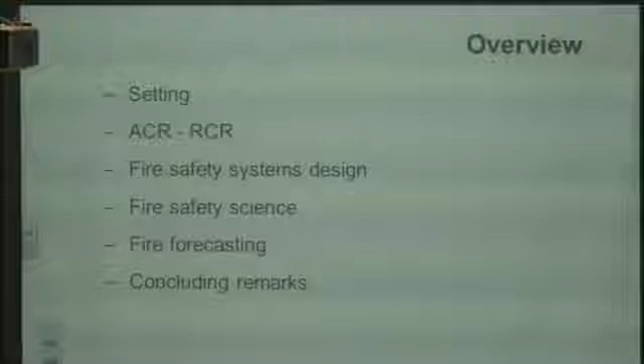So I would like to start off with a short overview by introducing a concept that I kind of invented on this occasion. It's available computing resources versus required computing resources. So I would first like to have some philosophical discussion, if you like, on this concept. And I'll briefly touch upon what could be the consequences in the context of fire safety systems design, but the main body of this talk will be about fire safety science and how numerical simulations, to my opinion, might help improve our knowledge in this interesting field.

If I have time, I'll also briefly touch upon fire forecasting, and then obviously I'll try to end with some concluding remarks. Now, before saying what I will talk about, I first want to say a few things that I will not talk about, and not because they would not be interesting, but you have to make some choices. So I will not present a review of existing models in the state of the art of today. So if you were expecting that, I'm sorry to let you down, but this is not the contents of this talk. And I will also not talk about how you can assure quality of numerical simulations per se. That's also very important and very interesting, but this is not the issue of today.

I will also restrict myself to the gas phase. So that means I will not say anything about pyrolysis modeling and only very few words on possible interaction of water with smoke and fire. So these things are very interesting, very relevant. Many of the talks here are on these topics. I'm well aware of that. But the story that I will tell is in a way generic. So it's not because I tell it in the context of gas phase that it would not apply to these domains either. Now, before you think this is going to be the shortest keynote ever, of course, I am going to address a few topics. So this is what I'll talk about, the gas phase simulations in these three domains.

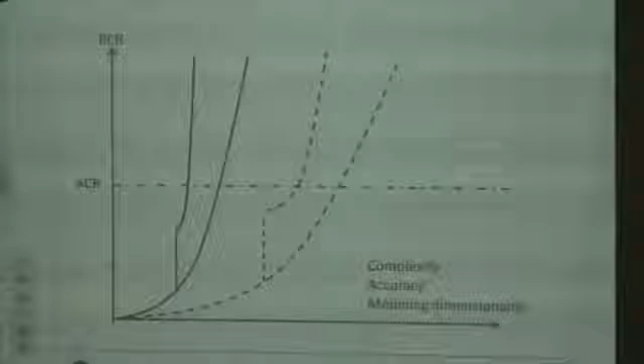Now, this is a sketch. So I'll talk you through this sketch. You see two axes. The vertical axis is the required computing resources. So you see, I have here a dashed dotted line, and I label this the ACR. This is a line that is not at all static. In fact, that line is going up all the time as we speak.

It's going up because we are helped by the hardware manufacturers, who are making the computers more and more powerful. But it's also helped by software developers who can make methods more efficient, that can give you more accuracy for a lower amount of hardware. So this is a line that's going up, and this is good news, because we have more and more power to try and solve our problems.

Now, on the horizontal axis, I have here three things. The first thing is called complexity, and complexity could refer to many things. It could refer to geometric complexity. If you have a more complex geometry, you will probably need more resources for a calculation in that complex geometry than when you have a simple geometry.

I also have here accuracy. Accuracy could also mean many things, but one easy way of thinking about this could be, for example, in the context of a large eddy simulation. If you want more accuracy, one way of doing that is choosing a finer grid. If you have a finer grid, you can expect, to a certain extent, in general, more accuracy. Now, if you want to improve accuracy, you're going to the right of this axis, and you see that the required computing resources are increasing.

The third aspect that I have here on the axis is the so-called modeling dimensionality. That's a difficult word, but what I mean there is that if you have more complex problems to solve, sometimes you also need more advanced modeling.

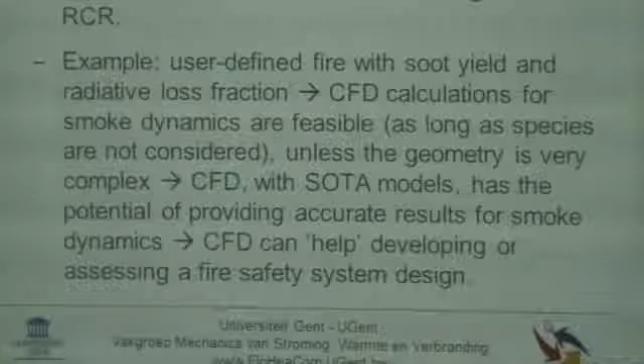So just as an example, I think we can state in a reasonably comfortable way that today with a user-defined fire, and if you prescribe, for example, the soot yield and radiative loss fractions, and you do CFD calculations for smoke dynamics in a building, unless the geometry would be extremely complex, I think the CFD with state-of-the-art models can deal with such cases. So that means in the context of fire safety system design, we can state that the CFD can definitely help developing or assessing fire safety system designs.

However, we need an investment, for example, in terms of the computational mesh. And that's quite an issue, because many, at least I'll talk for what I've seen myself, many of the systems design calculations are with LES on meshes that are at least one, sometimes even two orders coarser than what you would expect from academic research.

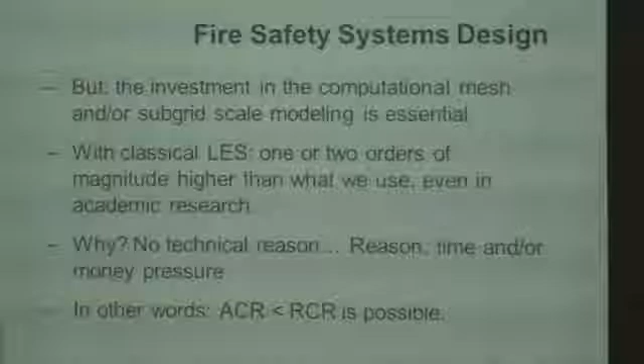So why is that? Well, there is no technical reason, there is just a practical reason. If you have a coarser mesh, then you have faster results. So that means that time or money pressure is a driving force, say, towards coarser mesh calculations. So in other words, it is possible that ACR is lower than RCR.

And then the questions arise, how reliable do the results remain? Are they rubbish immediately? Probably not, but how strongly and how quickly do they deteriorate? That's quite an important question. If we do not have perfect calculations, do we at least capture the trends correctly? Can we say that today?

And do we have an idea about safety margins? If we have a CFD result, for example, do we know what safety margin we need to apply? Is it 0? Is it 10%, 50%? And that's a question. And one of the things that makes life, I think, a bit more difficult in fire science is that the proof of the pudding is, unfortunately, not always in the eating.

So it could be that somebody makes a design on a relatively low quality CFD calculation, that design gets approved, the system is placed accordingly, and it might happen that that system never has to operate. In fact, most systems never have to operate. So you do not know whether that system was a good system or not. You simply do not know. So that means that we as a community do not learn quickly from experience.

And that's a difference from many other engineering fields, where you relatively quickly are confronted with the consequences of your own design. So it's not so clear, at least not to me, what the answers are to these questions. And I think, and I'll come back to that later in this talk, that benchmarking studies might provide a very interesting insight in this matter.

So this slide summarizes what I'd like to say about fire safety systems design. And I think we can say that state-of-the-art CFD calculations can help. However, I do not mean to rule out zone modeling. On the contrary, I think a combination perhaps of CFD calculations in regions that really matter for accuracy, for example entrainment and fire dynamics, and zone modeling in regions far away from the fire source with relatively easy flow fields could be a very valuable thing to do.

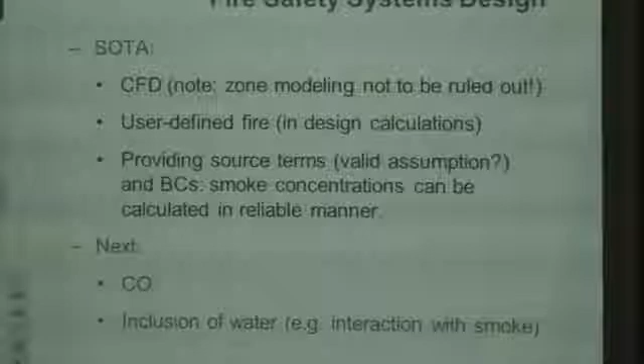In design calculations, I think we have to face, in the context of CFD, that we will keep on using user-defined fires in the foreseeable future, that we will not be in the position of calculating fire spread. And maybe it's not even that important in design calculations because often you do not know where the fuel is.

And if you provide the source terms, and you can question whether that is a valid assumption. I mean here source term in terms of heat release rate, obviously, but also in terms of soot yield and maybe radiation fraction, and that then you can calculate smoke concentrations in a reliable manner, because this is essentially a convection diffusion equation with a source term as a boundary. And we are there. I mean, that is quite okay.

At the level of CO predictions, I think that's another story, because there is a lot of work going on, a lot of progress being made, but here we definitely have quite complex chemistry involved, and I also think that one of the next steps is going to be the true inclusion of interaction of water with, for example, smoke at the level of fire safety systems design calculations.

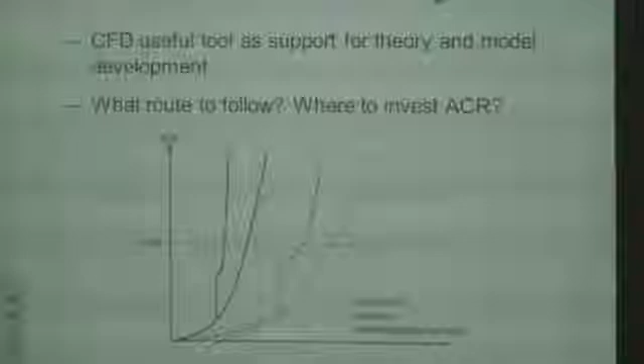So let's move on to fire safety science. And there I'd like to start off with a statement, and I hope that is not too provocative, is that CFD might be a very useful support for the development and further understanding also of fire theory. Then the question is, what route do we need to follow? And I remind you of this graph of a few minutes ago. If we have now this additional available computing resources, where do we invest it? Do we try to do more complex calculations, more complex geometries, more directly going on to interaction with sprinklers? Do we invest it in accuracy?

Accuracy, for example, we could keep on refining computational meshes down to so-called direct numerical simulations. In a way, you could see the similarity with using a camera with higher and higher resolution, and so looking at more and more details in the flow field. And we can learn from that, and we can look at detailed entrainment processes. So that could be a way to follow. Or do we go to more complex models, more higher dimensional models? And where do we put the effort, or where do we put the resources that we have?

So, well, if you think about going to DNS, then you're actually trying to use the full potential of going down to the lowest level of the Navier-Stokes equations. And that could be a possibility. However, we must realize that, for example, in the turbulent combustion community, this is also being done. So I think personally that it could be very worthwhile to try and import as much knowledge as possible from other fields that are already doing part of our jobs.

There is one exception, perhaps, and that is DNS calculations of low Reynolds number boundary layers in combination with heat and mass transfer. This is something that is, at least to the best of my knowledge, not intensively studied in the combustion community, because this is quite peculiar for fire, that many things are going on close to a wall. And the Reynolds number in fire is not very high. So these are things that we might want to consider doing some work on.